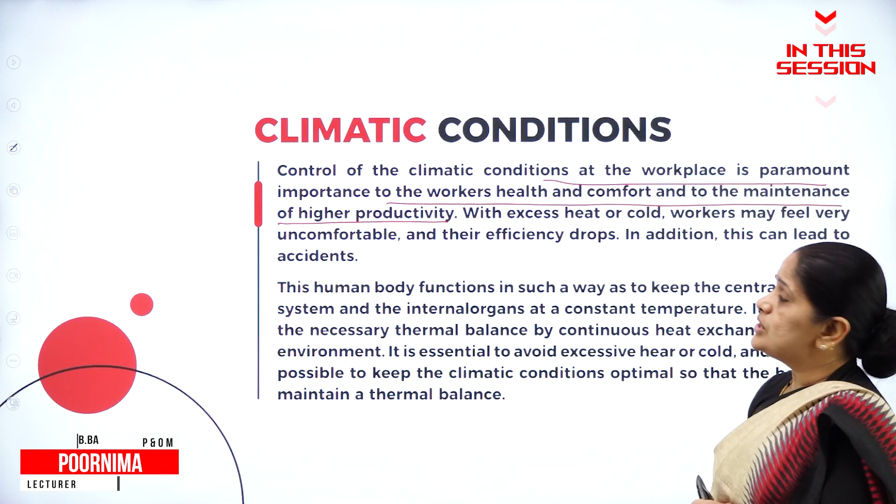Now, what is the kind of lighting you need? What is the degree of lighting you need? It all depends on the minuteness of the work. Control of the climatic conditions is also essential for workers' health and comfort. If it is too hot, there should be provision for fans or ACs. Proper ventilation facility will help in evaporation of the sweat on the body.

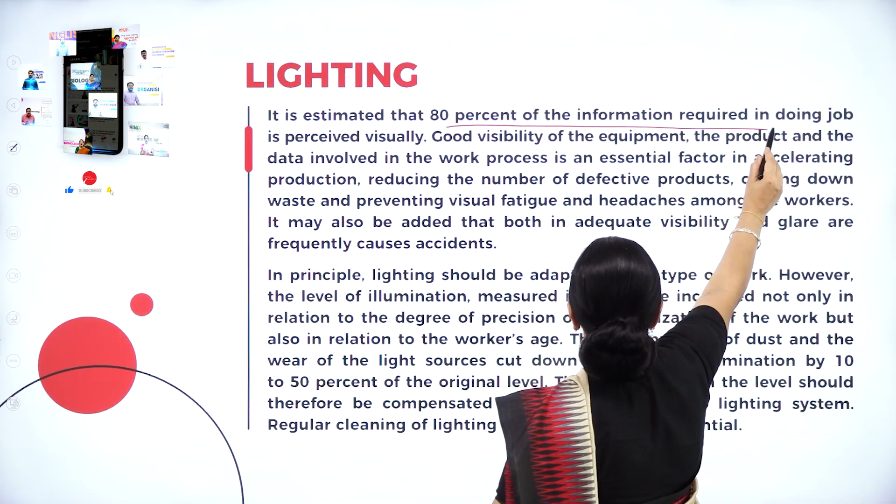It is estimated that 80% of the information required in doing the job is perceived visually. So, whenever we are told a job, the job has to be perceived visually by the worker and then he has to do the job.

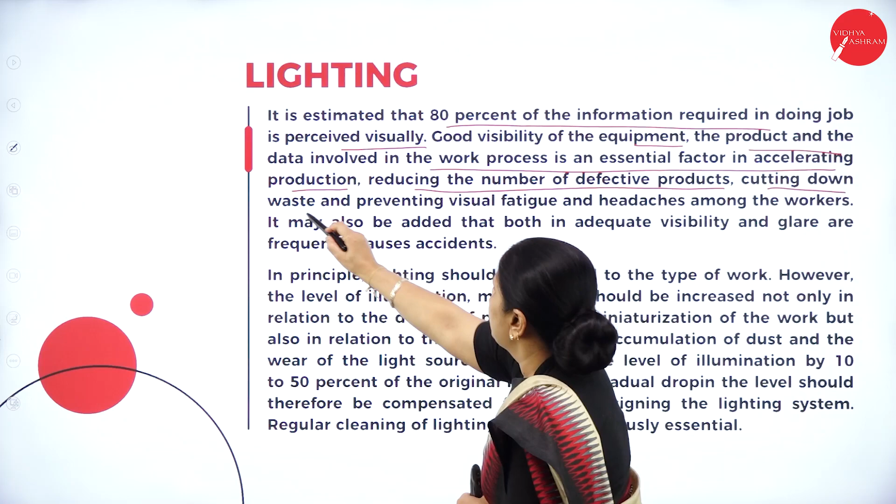Good visibility of equipment, the product and the data involved in the work process is essential in accelerating production, reducing the number of defective products, cutting down waste and preventing visual fatigue and headaches among workers. So, if you have proper lighting facility in the factory layout, we can reduce the number of defective products.

So, if the number of defective products comes down, there will be a reduction in waste, and we can also prevent visual fatigue and headaches among the workers. So, the workers' headaches can be reduced.

It may also be added that both inadequate visibility and glare are frequent causes of accidents. There should not be too much glare in the lighting, nor inadequate lighting — these are the main causes for accidents.

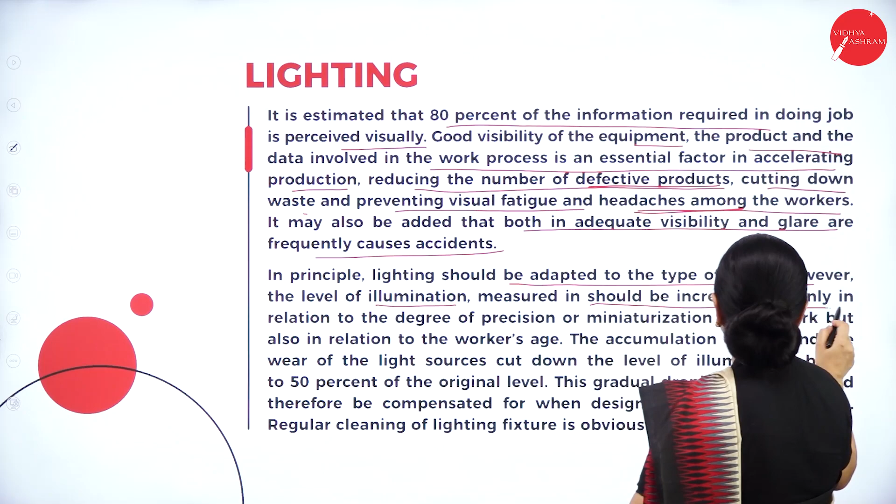In principle, lighting should be adapted to the type of work. However, the level of illumination should be increased not only in relation to the degree of precision or miniaturization of the work, but also in relation to the worker's age.

Now, what is the kind of lighting you need? What is the degree of lighting you need? It all depends on the minuteness of the work.

If you are having very precision work to be done, for example, in a watch assembling unit, you need light focused on the product itself, and the worker has to work on the product with the help of that light because it involves very miniature parts.

So this kind of work requires, depending on the kind of product we are manufacturing, a specific lighting system, also in relation to the worker's age.

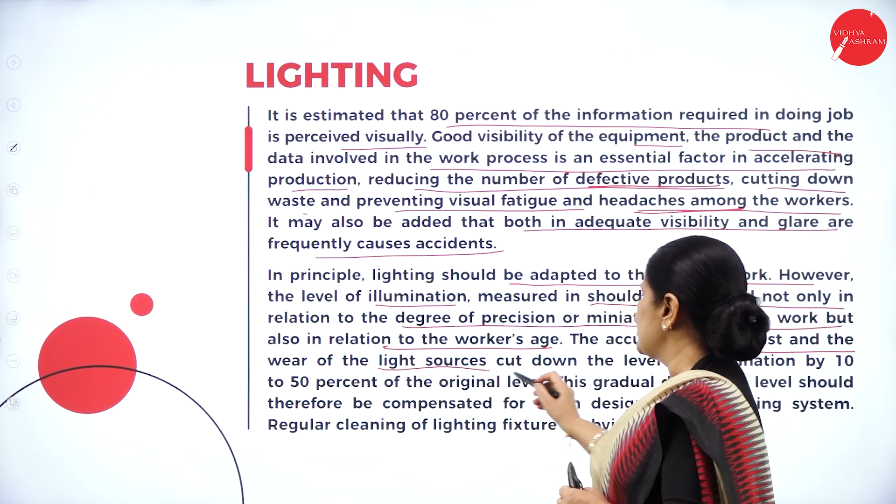The accumulation of dust and the wear of the light sources cut down the level of illumination by 10 to 50% of the original level. So we have to see that proper lighting is essential for the working of employees.

This gradual drop in the level should therefore be compensated for when designing the lighting system. Regular cleaning of lighting fixtures is obviously essential. So, when providing lighting facilities in the factory layout, we should also provide for regular cleaning of the lighting.

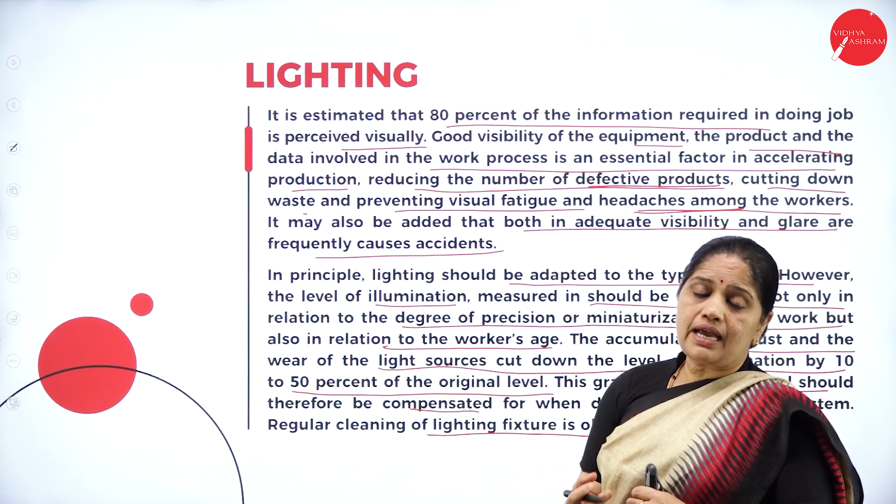Whenever dust settles on the bulb, it will reduce the glare or the light it emits. So, regular cleaning is essential.

Excessive contrast in lighting levels between the worker's task and the general surroundings should also be avoided. There should not be too much difference between the lighting in the work area and the general area. The use of natural light should also be encouraged.

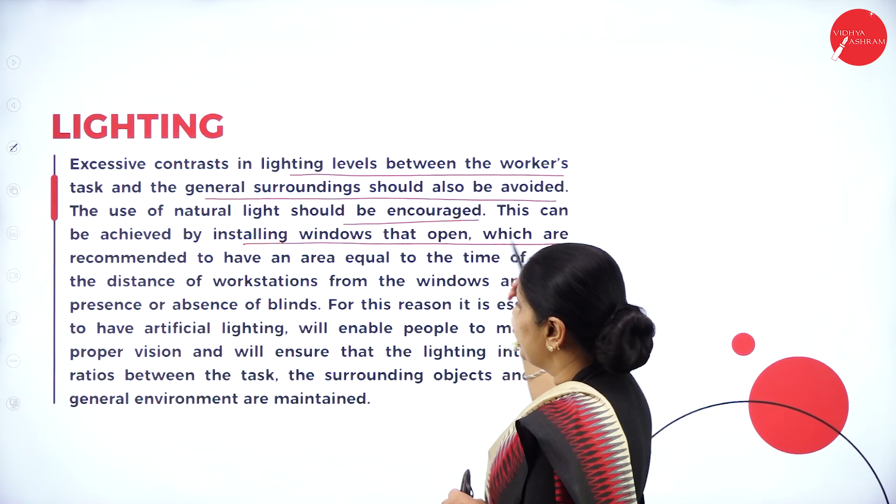Try to make maximum use of the natural light available. This can be achieved by installing windows that open, with an area recommended in relation to the time of the day, the distance of the workstation from the windows, and the presence or absence of blinds.

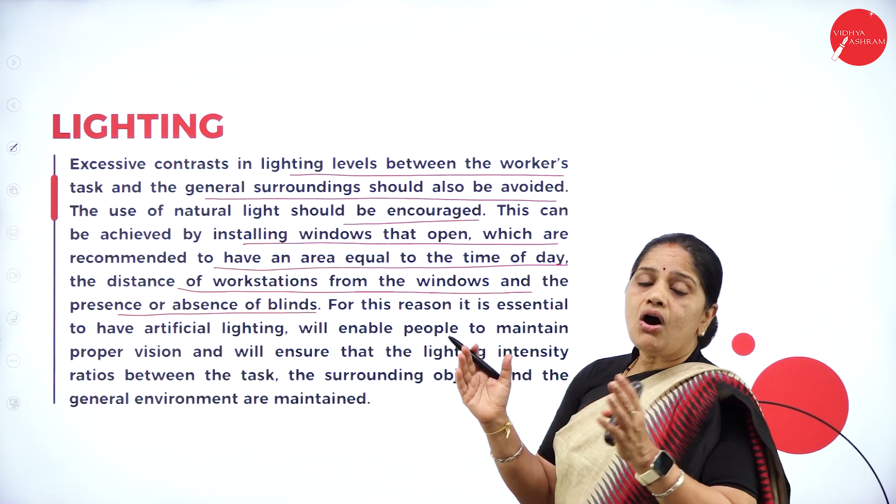So, keeping all these things in mind — the area in relation to the time of day, the distance of the workstation from the windows, and the presence or absence of blinds — all these have to be considered when installing windows.

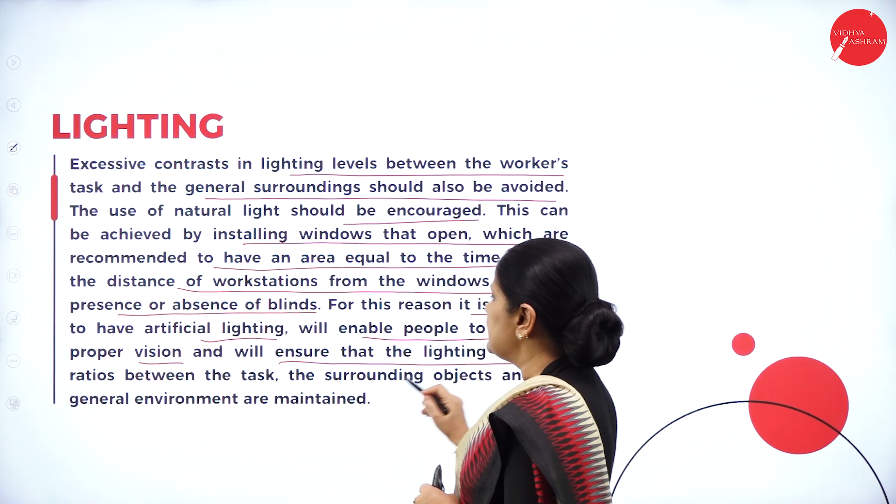For this reason, it is essential to have artificial lighting which will enable people to maintain proper vision and ensure that the lighting intensity ratios between the task, the surroundings and the general environment are maintained.

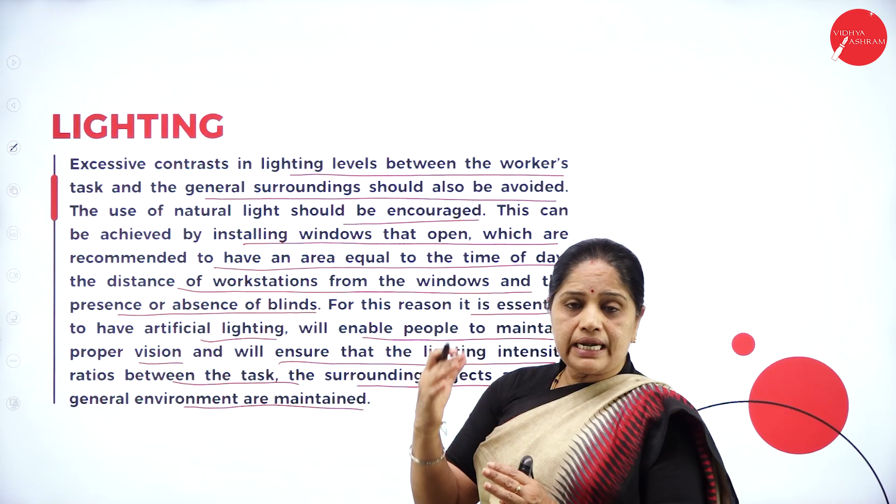So, if there is a lot of difference between the workstation and the general surrounding area of lighting, then it is best to resort to artificial lighting, which will try to reduce the difference between the general lighting and the lighting at the workstation.

Next is the control of lighting. For uniform light distribution, install an independent switch for the row of lighting fixtures closest to the windows. This allows the light to be switched on and off depending on whether or not the natural light is sufficient.

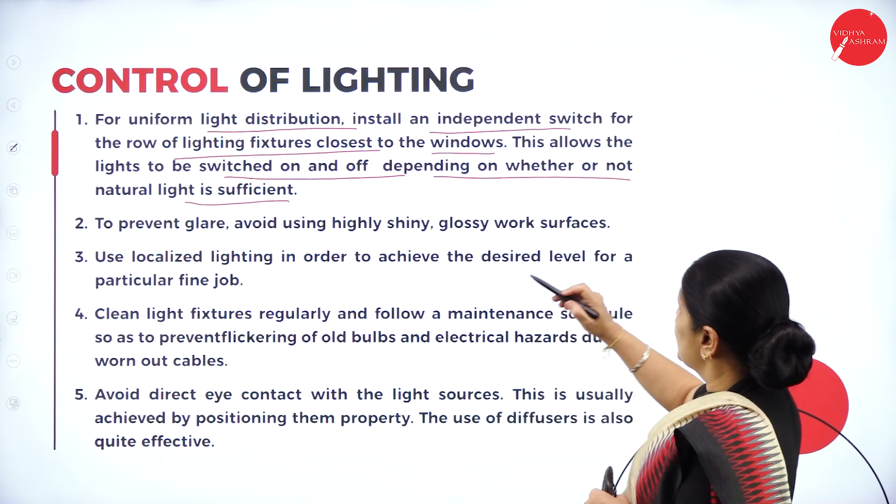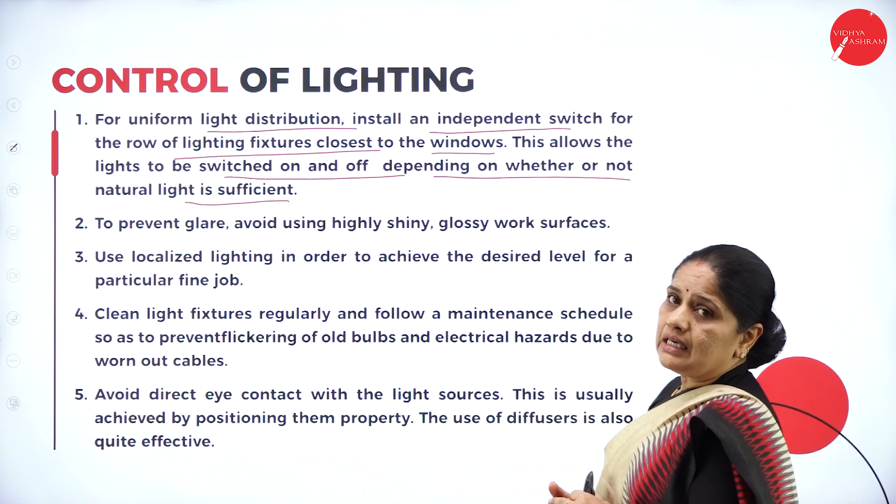For uniform light distribution, install an independent switch for the row of lighting fixtures closest to the windows. So as and when the natural light comes down, that is in the evening when the light is reducing, you can switch on the artificial light.

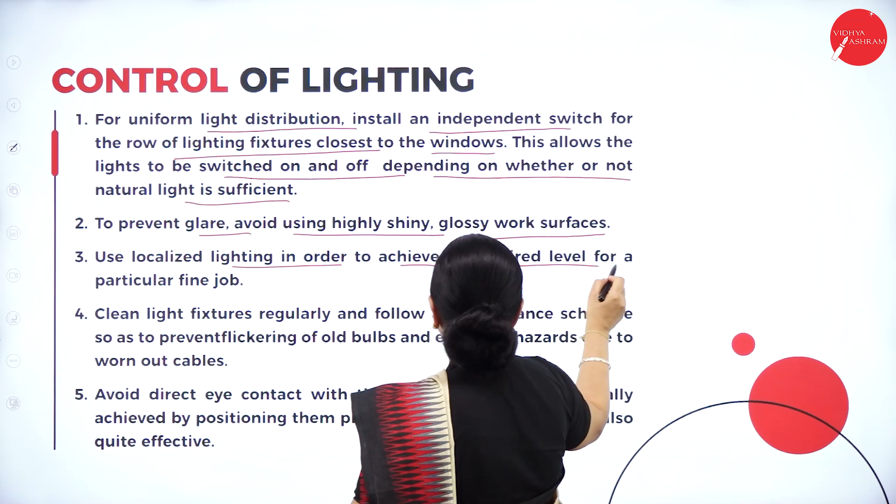To prevent glare, avoid using highly shiny glossy work surfaces. So the work surfaces also should be such that they will not glare the workers. Then use localized lighting in order to achieve the desired level for a particular fine job. So localized lighting should be used.

Clean light fixtures regularly and follow a maintenance schedule so as to prevent flickering of old bulbs and electrical hazards due to worn out cables. So we should also ensure that there is regular maintenance of the cables and regular cleaning of the lights in order to see that there is no flickering of the light and no short circuit because of the worn out cables.

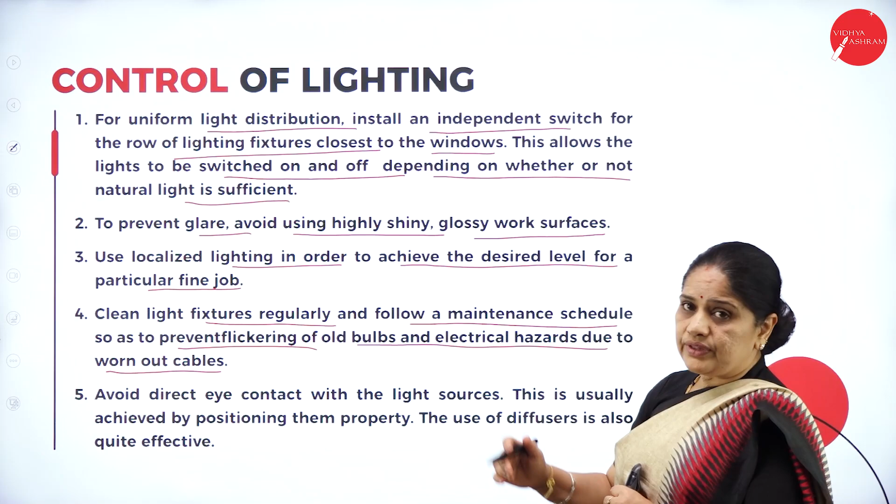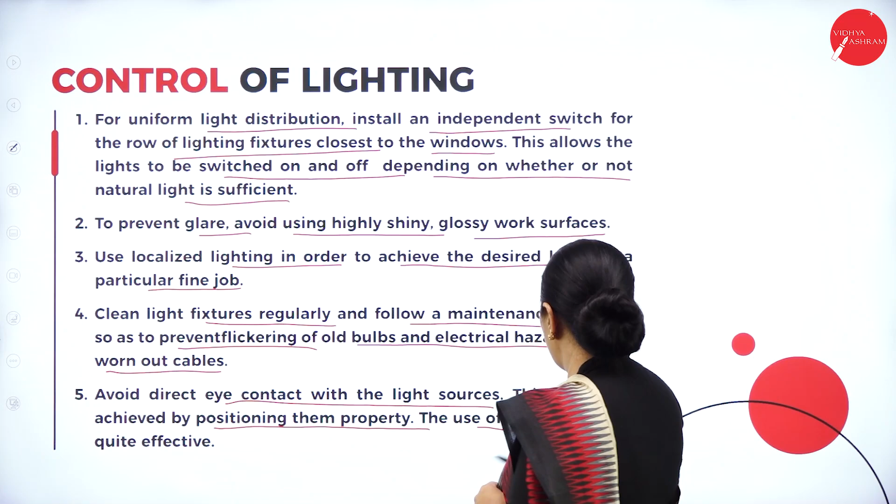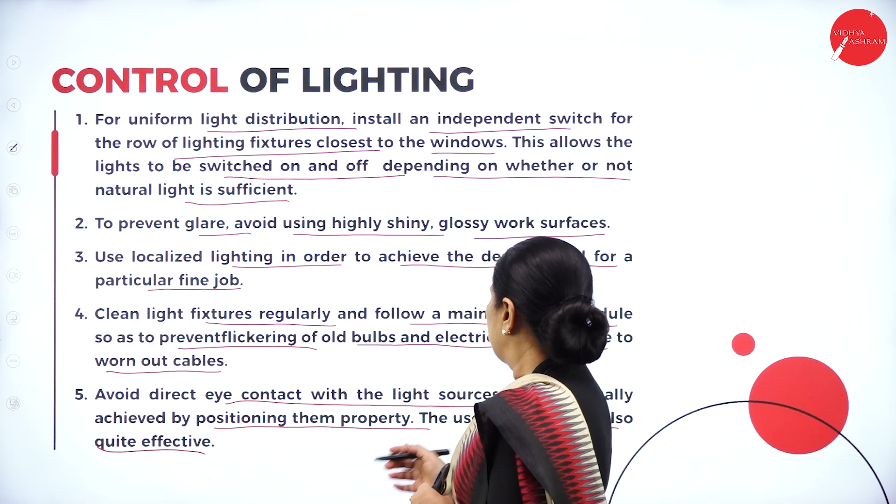Avoid direct eye contact with the light sources. This is usually achieved by positioning them properly. The use of diffusers is also quite effective. So try to see that there is no direct eye contact with the light sources. This can be achieved by positioning them properly. See that the workers don't come in direct contact with the light sources.

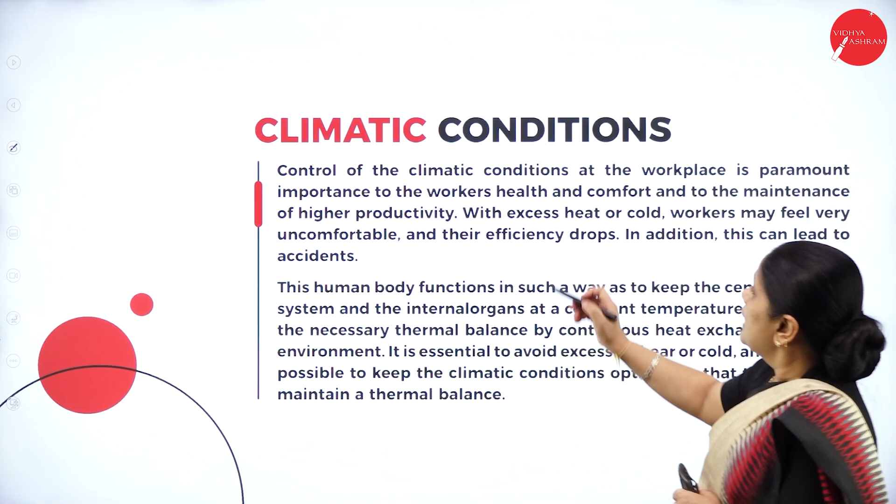Then climatic conditions. The control of the climatic conditions at the workplace is of paramount importance to the workers' health and comfort and to the maintenance of higher productivity. So control of the climatic conditions is essential for workers' health and comfort. If it is too hot, there should be provision for fans or ACs. If it is too cold, there should be provision for heaters to keep the workers comfortable when they

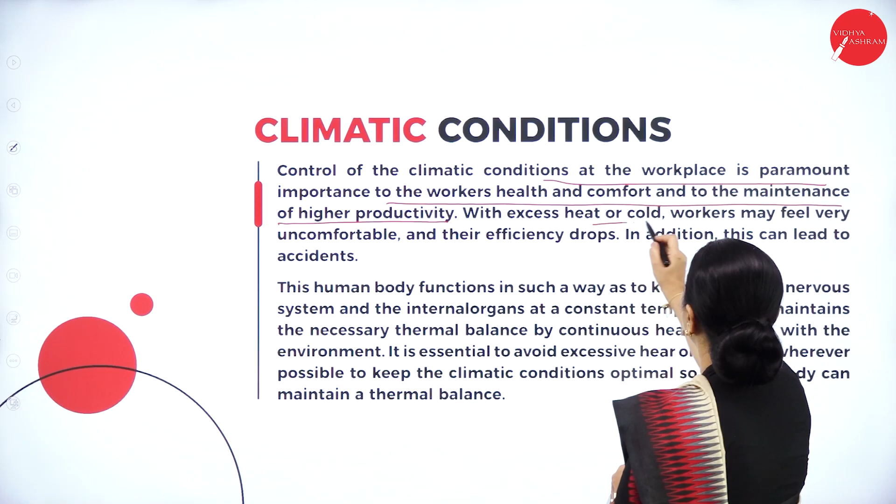are working. With excess heat or cold, workers may feel very uncomfortable and the efficiency drops. So try to keep the workers as comfortable as possible, because the comfort level of the workers will have a direct effect on their efficiency. In addition, this can lead to accidents.

The human body functions in such a way as to keep the central nervous system and the internal organs at constant temperature. So the human body will sustain any kind of heat or cold. It will try to keep itself cool or warm depending on the climatic conditions. It maintains the necessary thermal balance by continuous heat exchange with the environment.

It is essential to avoid excessive heat or cold and wherever possible to keep the climatic conditions optimal so that it maintains a thermal balance. So we should try to ensure that there is proper thermal balance in the human body.

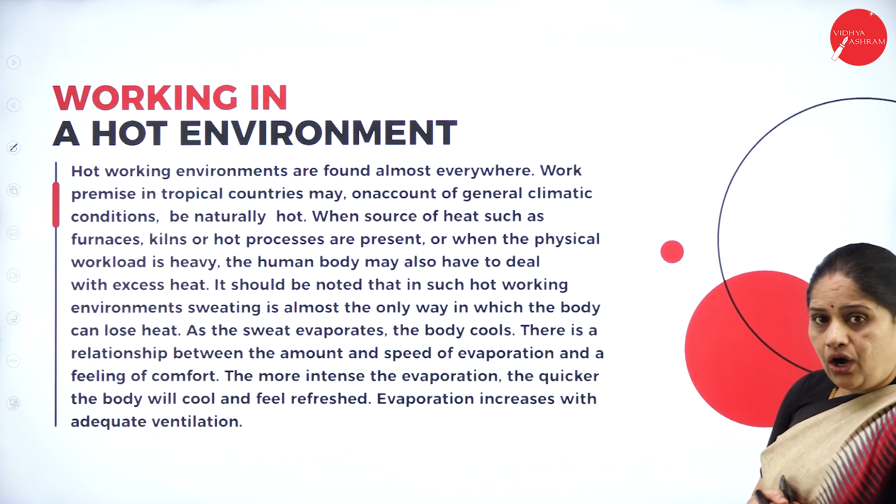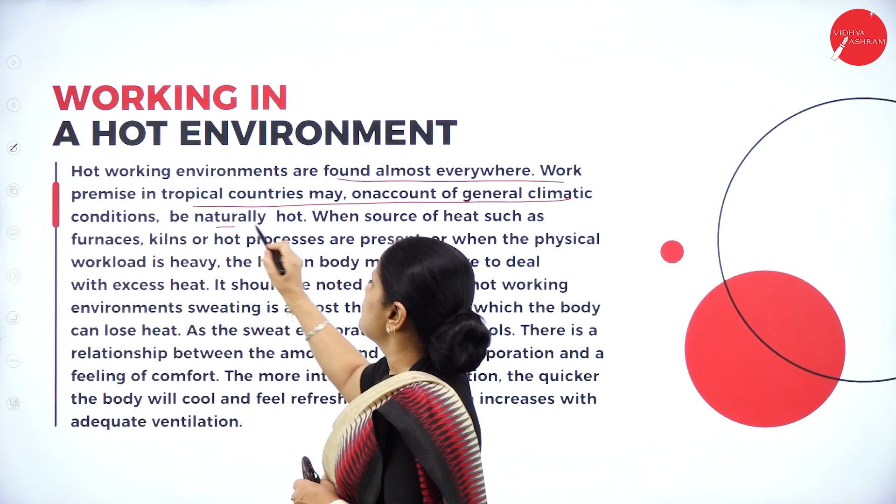Then next, working in a hot environment. Hot working environments are found almost everywhere. Work premises in tropical countries may, on account of general climatic conditions, be naturally hot. Usually in tropical countries like India, we have a very hot climate and workers have to work in this hot climate.

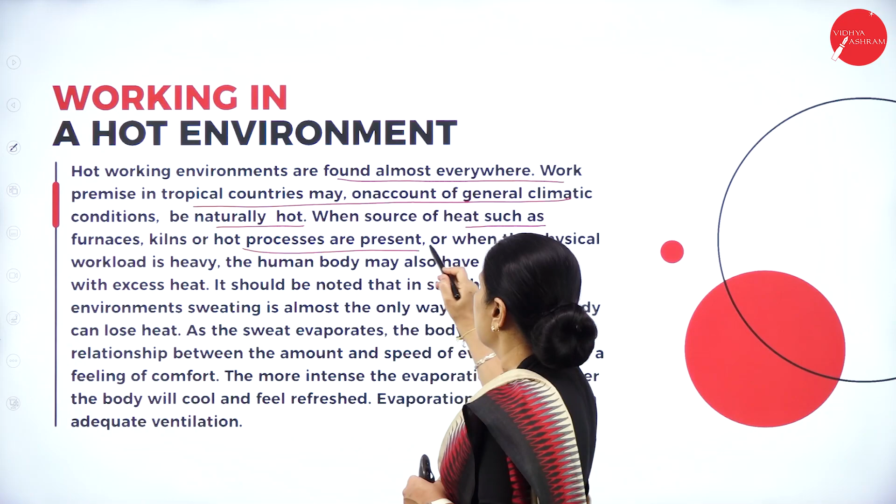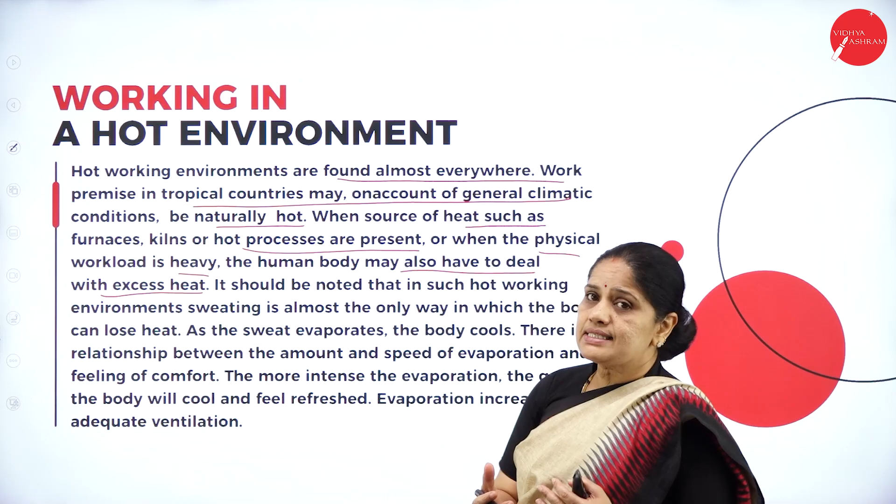When sources of heat such as furnaces, kilns or hot processes are present, or when the physical workload is heavy, the human body may also have to deal with excessive heat. So not only are the climatic conditions hot, but also the work processes. For example, in an iron and steel industry, the workers have to deal with the hot furnace and hot molten iron which will be flowing. So with all this excessive heat, the human body will have to cope with it.

It should be noted that in such hot working environments, sweating is almost the only way in which the body can lose heat. So the body tries to maintain its temperature by sweating. With the help of sweating, the body tries to cool itself. As the sweat evaporates, the body cools.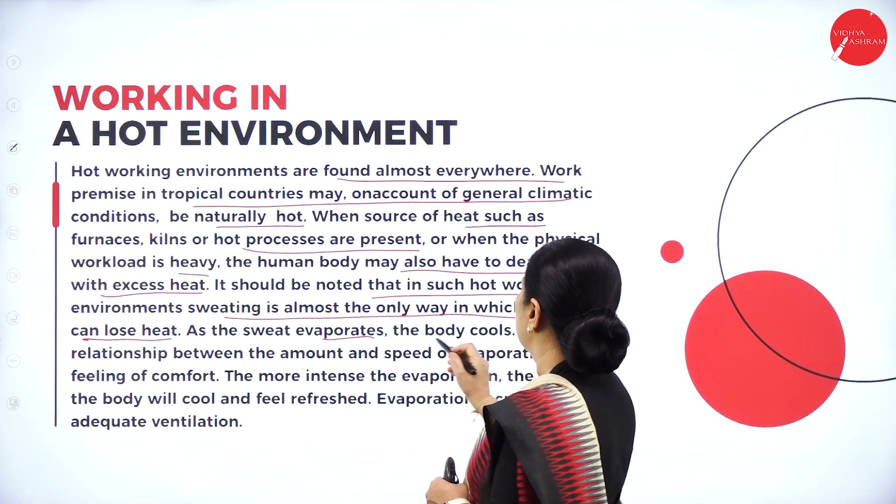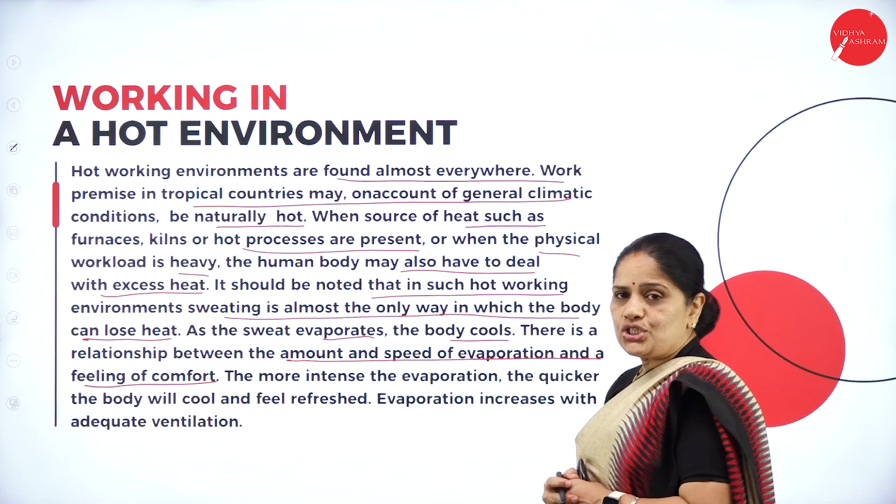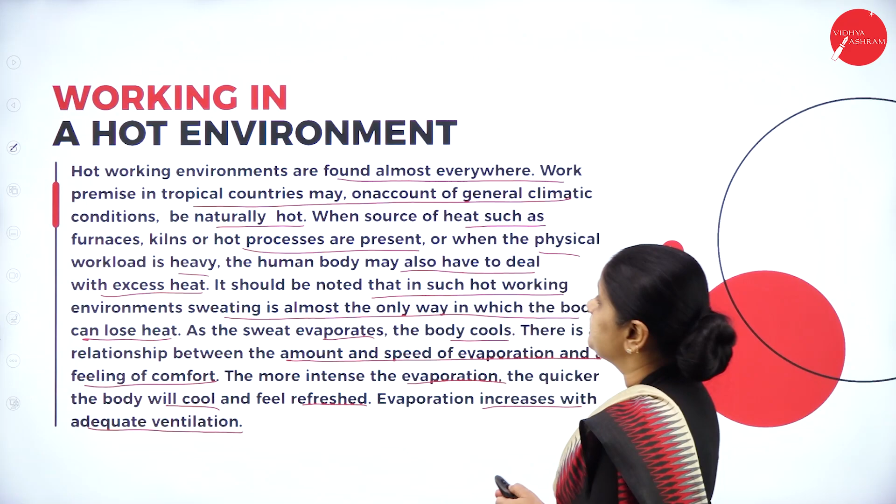There is a relationship between the amount and speed of evaporation and a feeling of comfort when the sweat evaporates from the body. The more intense the evaporation, the quicker the body will cool and feel refreshed. Evaporation increases with adequate ventilation. So when there is proper ventilation in the organization, it will help in evaporation of the sweat which is on the body.

Then, working in a cold environment. Working in a cold environment was once restricted to non-tropical or highly elevated regions, usually found in the cold countries or in the hilly regions where the weather is very cold. Now, as a result of modern refrigeration, various groups of workers, even in tropical countries, are exposed to a cold environment. So even in tropical areas, because of increased refrigeration facilities, we find people working in the cold environment.

Exposure to cold for short periods of time can produce serious effects, especially when workers are exposed to temperatures below 10 degrees centigrade. So we can find some people working in a refrigerated atmosphere, especially in the case of tissue culture or in the manufacture of certain drugs which have to be manufactured in a very cold environment.

Then workers have to be working there in temperatures below 10 degrees. The loss of body heat is uncomfortable and quickly affects the work efficiency. So people who are working under such cold climate, it will reduce their work efficiency.

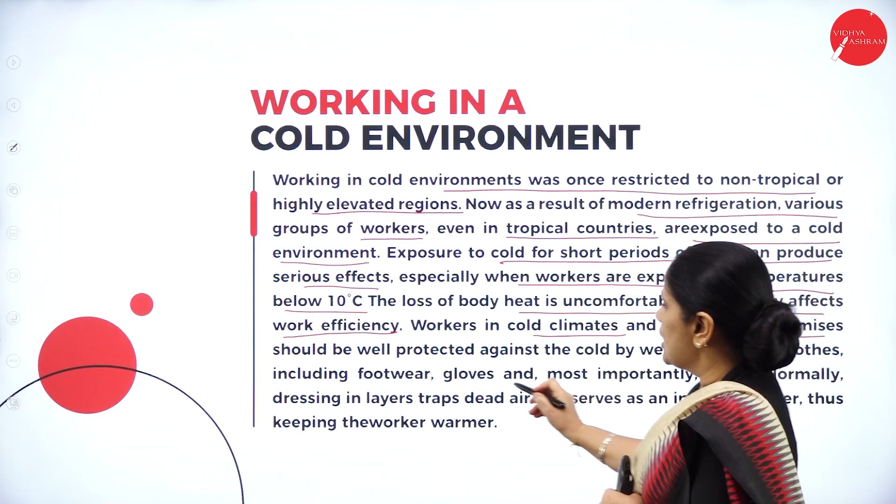Workers in cold climates and refrigerated premises should be well protected against the cold by wearing suitable clothes, including footwear, gloves, and most importantly, a hat. So workers who are working in such conditions, we have to provide them with protective clothes so that they can withstand the cold. So they should be provided with the gloves, hat, and also the proper footwear.

Normally, dressing in layers traps dead air and serves as an insulation layer, thus keeping the worker warmer. So try to see that the workers are kept warm when they are working under such cold conditions.

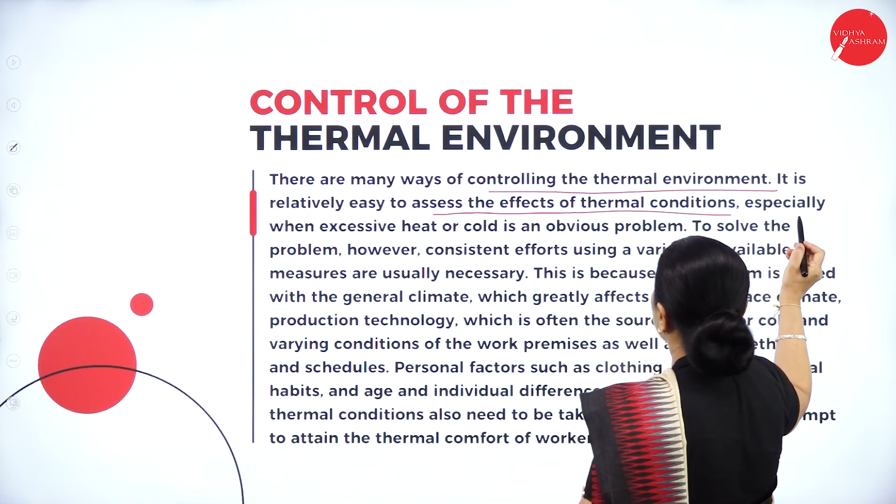Next, control of the thermal environment. There are many ways of controlling the thermal environment. It is relatively easy to assess the effect of the thermal conditions, especially when excessive heat or excessive cold is an obvious problem. So, in case of thermal conditions, try to see that the worker is not exposed to the extremities of heat or cold. To solve the problem, however, consistent efforts using a variety of available measures are usually necessary. So, how do we cope with the extremities of the climate?

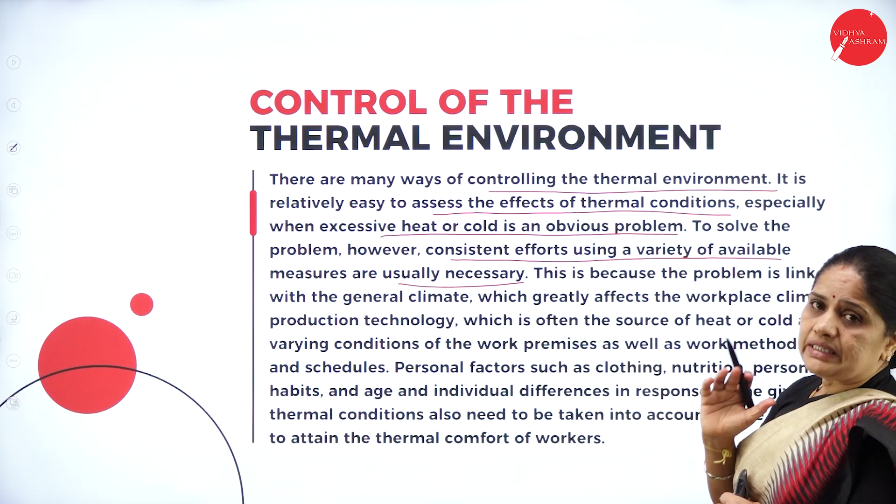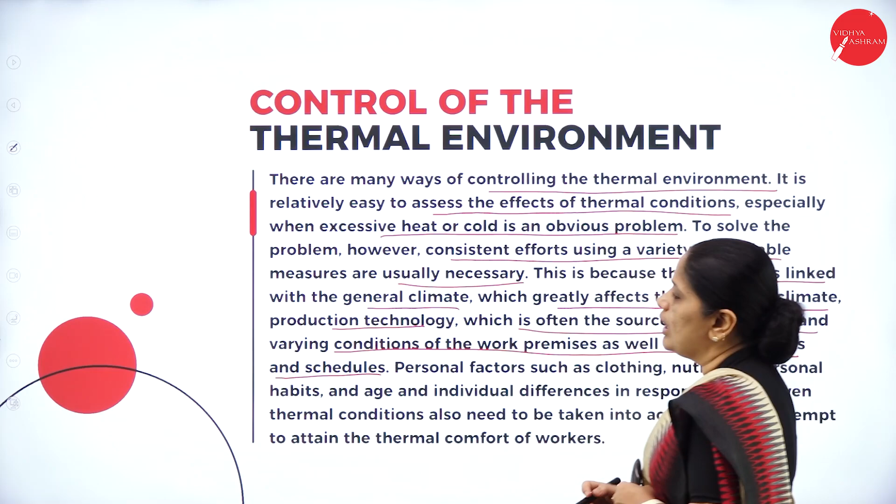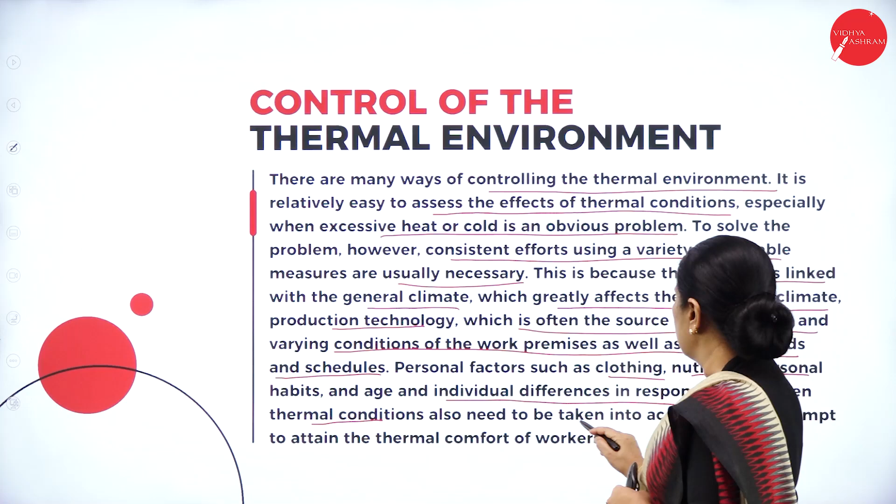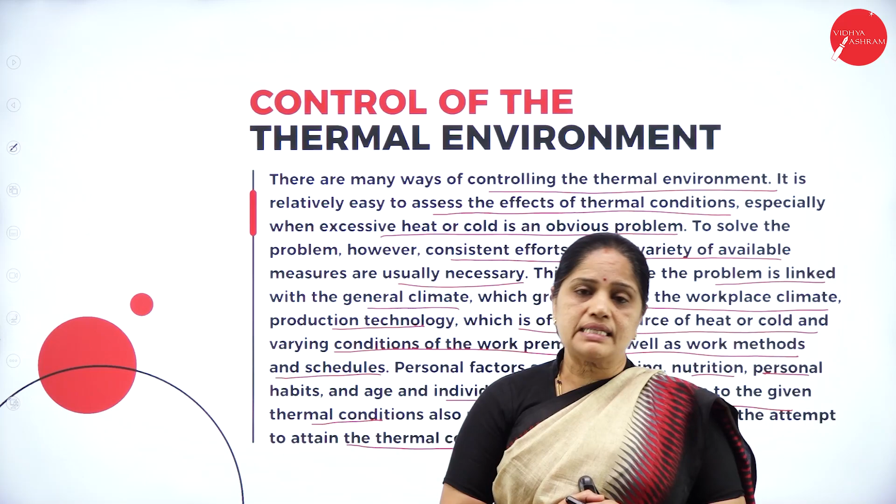This is because the problem is linked with the general climate, which greatly affects the workplace climate, production technology, which is often the source of heat or cold, and the varying conditions of the work premises, as well as work methods and schedules. So all this will have a bearing on the thermal climate. Personal factors such as clothing, nutrition, personal habits, and age, and individual differences in response to the given thermal conditions also need to be taken into account in an attempt to attain the thermal comfort of the workers. So the thermal comfort of the workers has to be taken into consideration when we are making them work in such an environment.

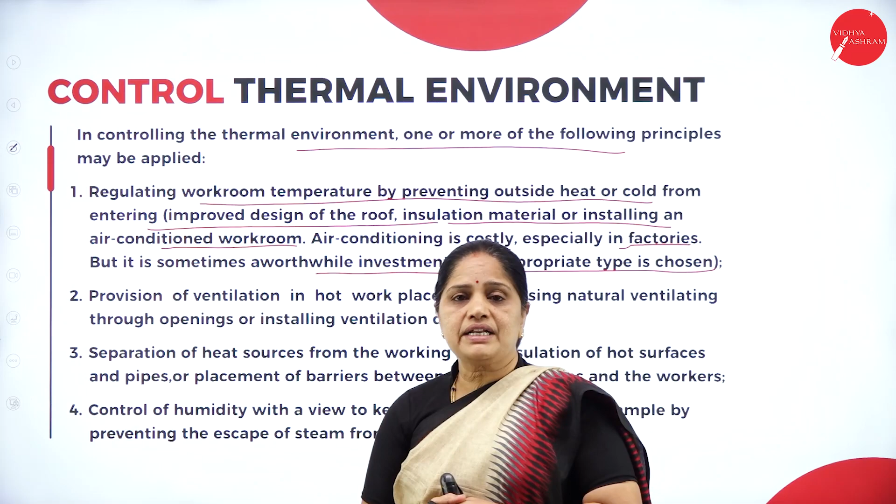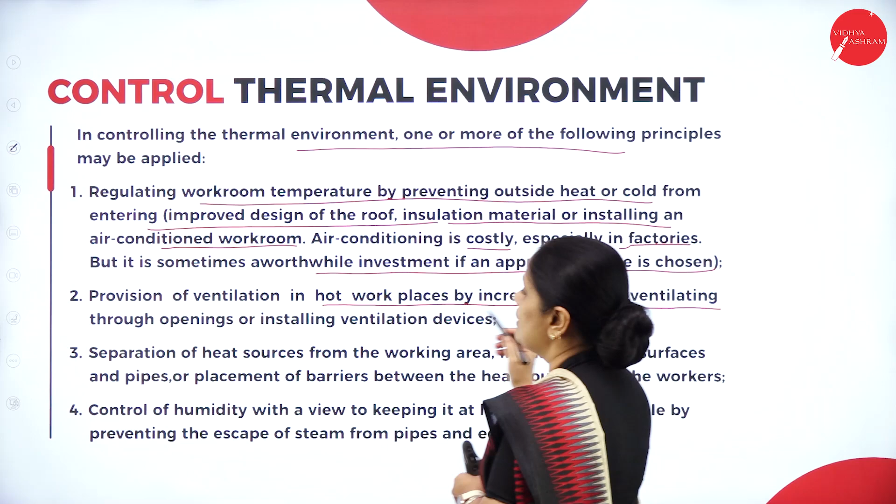Air conditioning is costly, especially in factories, but it is sometimes a worthwhile investment if an appropriate type is chosen. Air conditioning of the entire factory will be a very costly affair, but it depends on the management policy. Provision of ventilation in hot workplaces by increasing natural ventilation through openings or installing ventilation devices. So try to provide as much ventilation as possible.

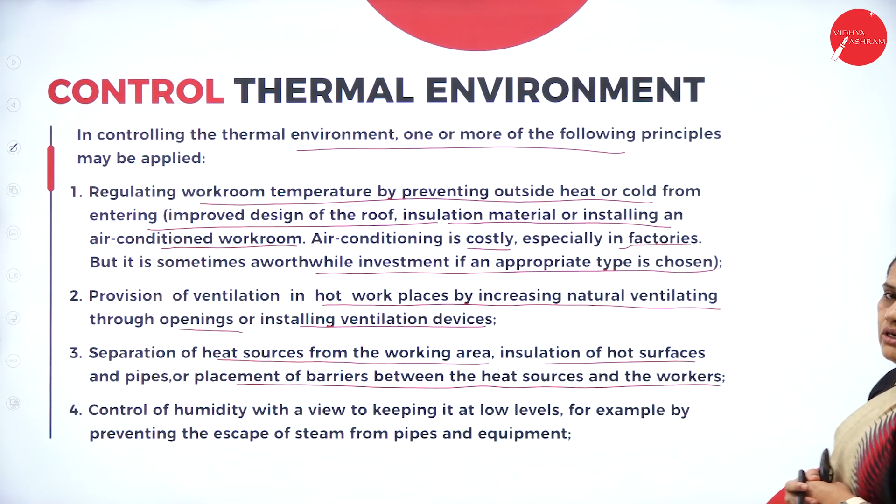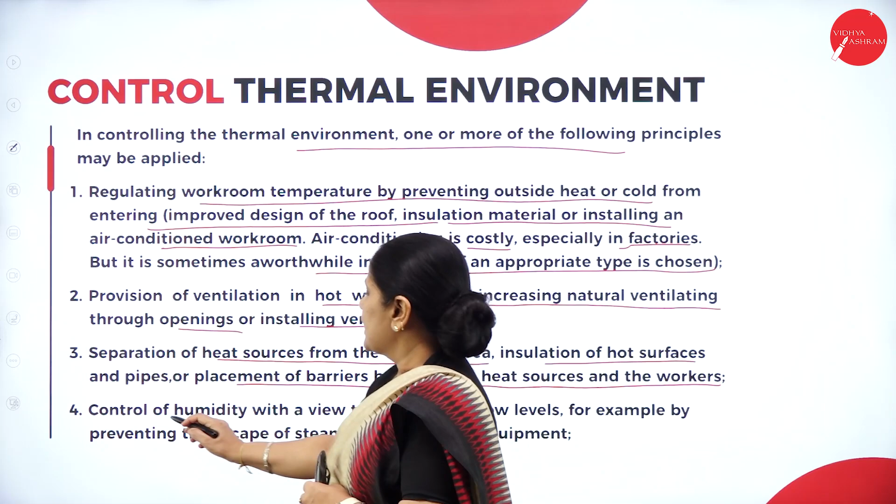Separation of heat sources from the working area, insulation of hot surfaces and pipes, or placement of barriers between the heat sources and the workers. So when we separate heat sources from the working area, we can avoid the heat from reaching the employees. The control of humidity with a view to keeping it at low levels, for example, by preventing the escape of steam from pipes and equipment. So we can control the humidity by taking some preventive measures.

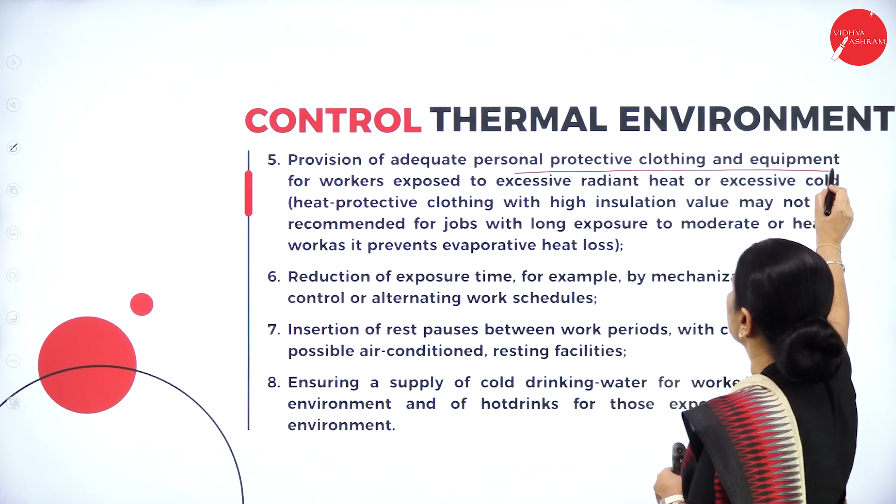Next, the provision of adequate personal protective clothing and equipment for workers exposed to excessive radiant heat or excessive cold. Heat protective clothing with high insulation value may not be recommended for jobs with long exposure to moderate or heavy work, as it prevents evaporative heat loss. So if you are giving protective gear to the employees, try to see that it does not have a bearing on the work efficiency. Try to see that it increases the efficiency of the workers.

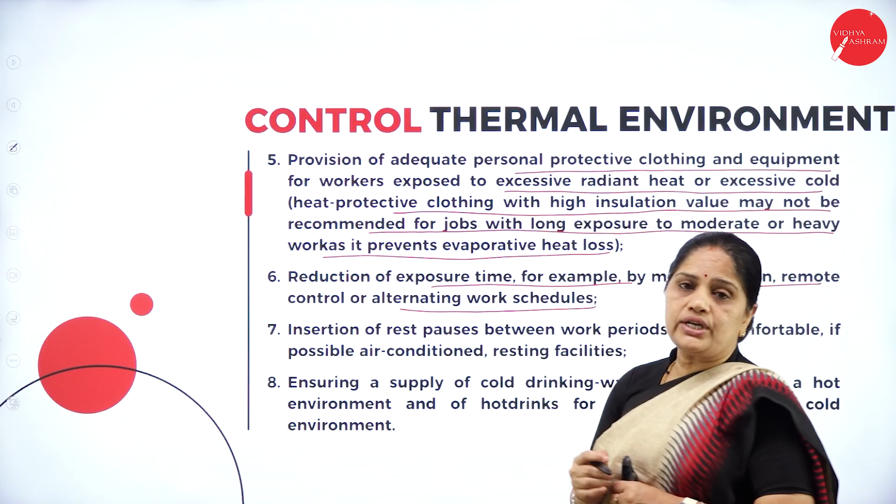The reduction of exposure time, for example, by mechanization, remote control, or alternating work schedules. So in case the worker has to work under such extreme conditions, proper provision should be made so that it can be mechanized. The entire process can be mechanized and operated by the worker with the help of remote control. In this way, we can protect the workers.

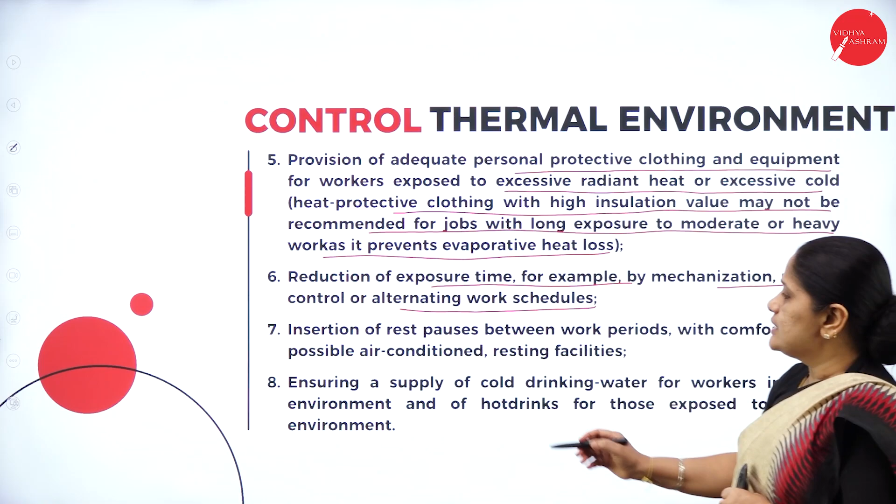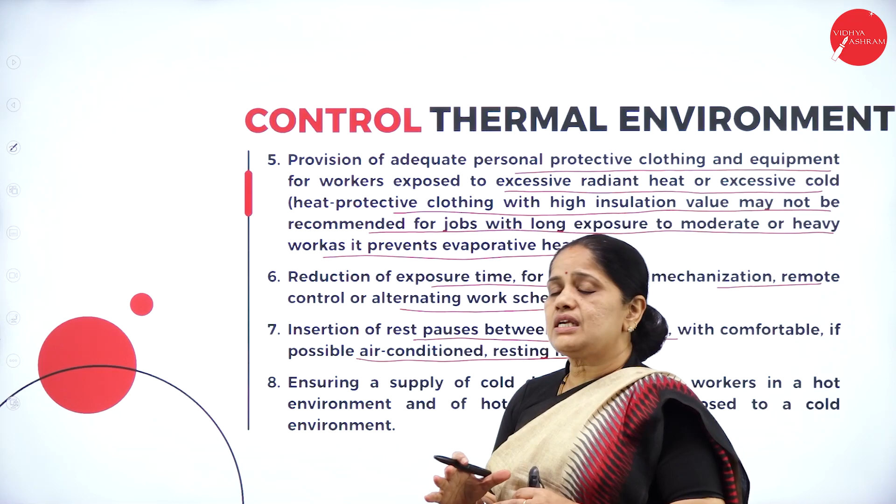And insertion of rest pauses between work periods with comfortable, possibly air-conditioned resting facilities. So if the worker has to work under hot conditions, there should be proper rest intervals for the worker. When he is resting, the resting area should be properly air conditioned so that he can bear the heat.

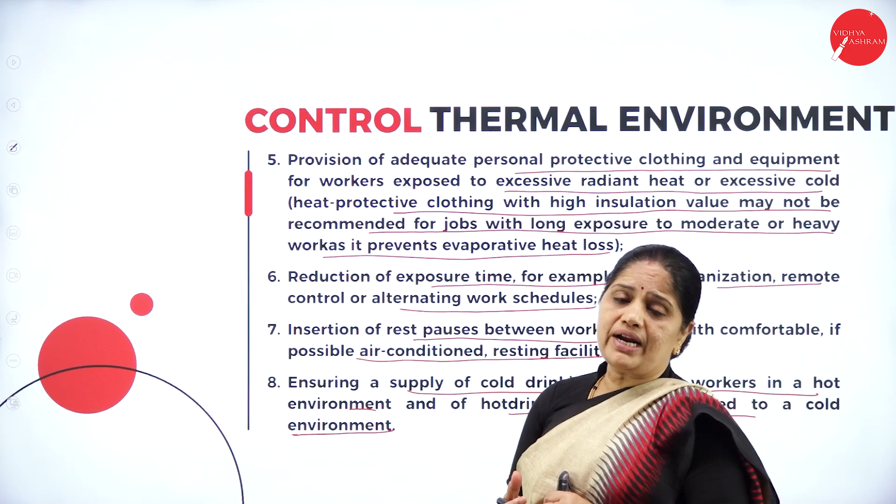Then ensuring a supply of cold drinking water for workers in a hot environment and hot drinks for those exposed to a cold environment. So if the worker is working in a cold environment, make provision for hot drinks. And if the worker is working in a hot environment, see that he is provided with cold drinks. Next, ventilation.

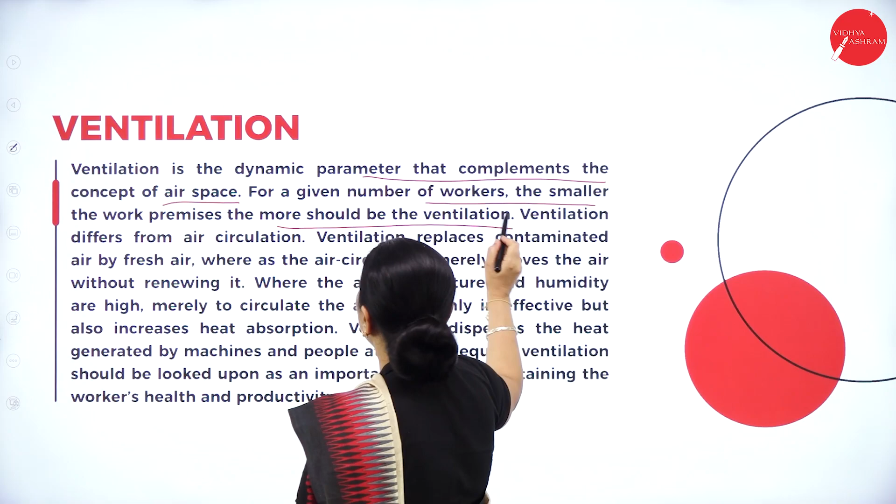Ventilation is the dynamic parameter that complements the concept of airspace. So, the movement of air within the building or factory can be complemented with the help of proper ventilation. For a given number of workers, the smaller the work premises, the more should be the ventilation. So if the workspace is small and the number of workers is more, then there should be proper ventilation provided.

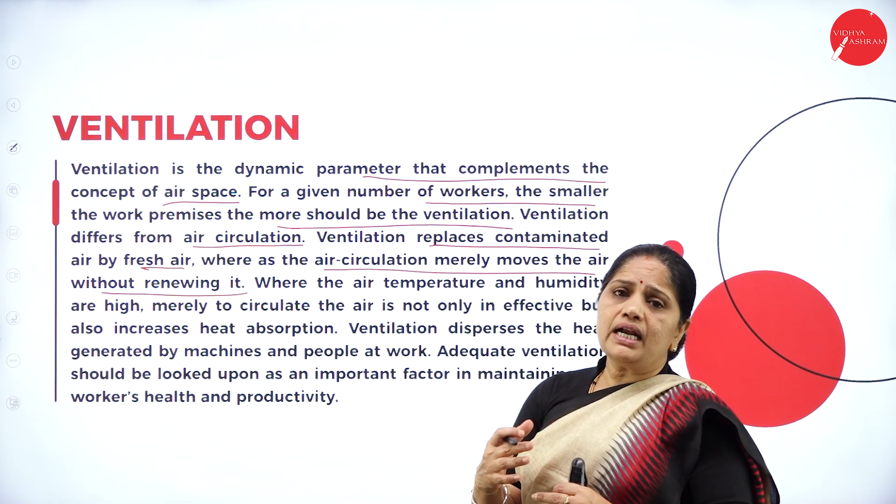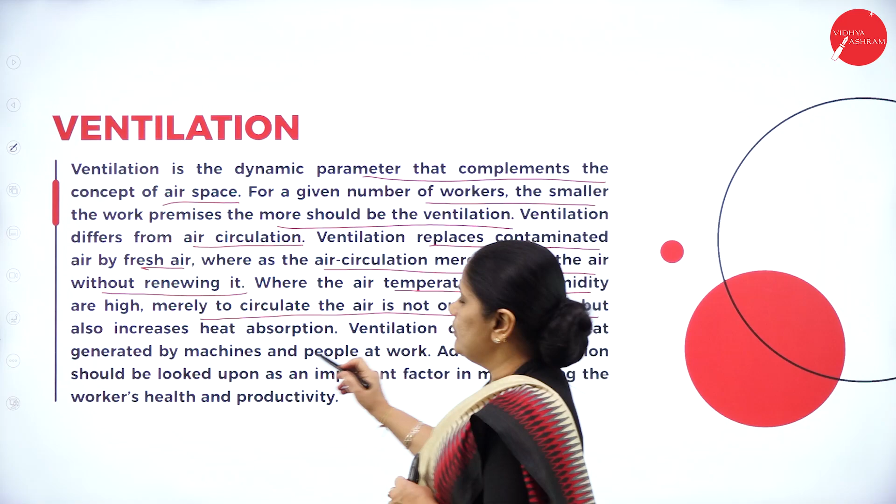Ventilation differs from air circulation. Ventilation replaces contaminated air by fresh air, whereas air circulation merely moves the air without renewing it. So ventilation should not be mistaken with air circulation. Ventilation means it will replace the contaminated air with fresh air, whereas air circulation will just be moving the air. Where air temperature and humidity are high, merely circulating the air is not only ineffective but also increases heat absorption.

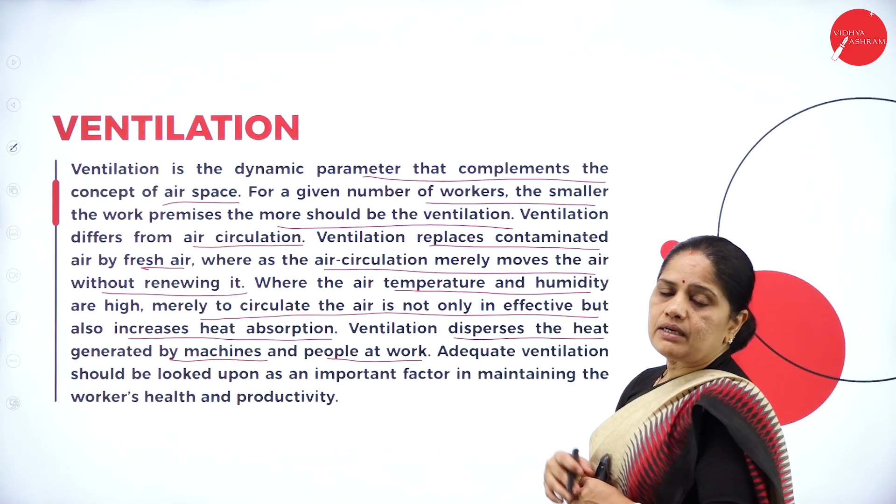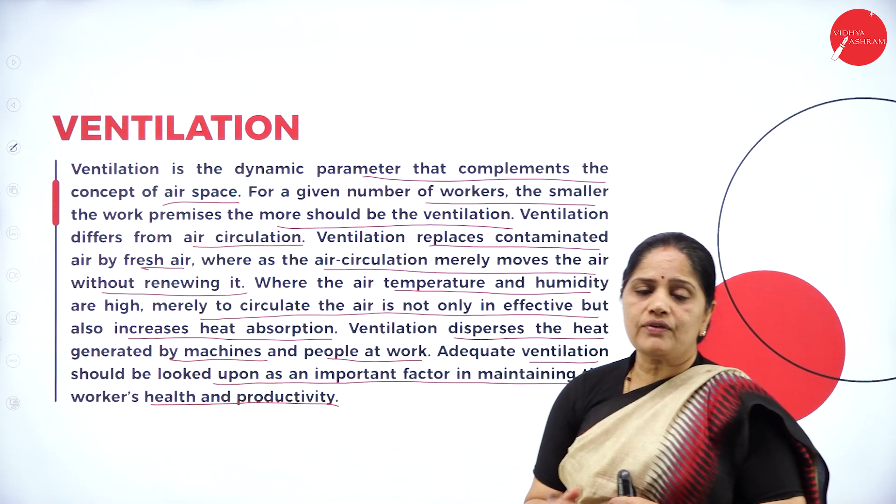So where the air temperature is very high, ventilation will help in having a cooling effect within the factory building. Ventilation disperses the heat generated by machines and people at work. Adequate ventilation should be looked upon as an important factor in maintaining the workers' health and productivity. In essence, ventilation will have a bearing on the worker's efficiency and his comfort zone. So, we should make proper provision for ventilation in the factory building.

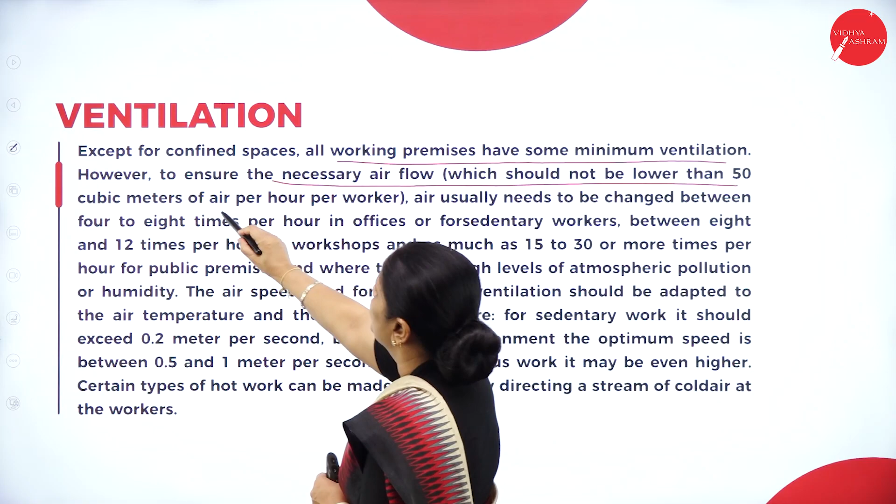Except for confined spaces, all working premises have some minimum ventilation. However, to ensure necessary airflow, which should not be lower than 50 cubic meters of air per hour per worker, air usually needs to be changed between 4 to 8 times per hour in offices or for sedentary workers, between 8 to 12 times per hour in workshops, and as much as 15 to 30 times for public premises where there are high levels of atmospheric pollution or humidity.

So, depending on the number of workers who are working in the environment, the air has to be changed. If there are more workers working in that confined space, then the air has to be changed at least 15 to 30 times per hour. But if the workers are fewer, then you can change the air between 4 to 8 times. So depending on the number of workers, we need to have proper ventilation of the air.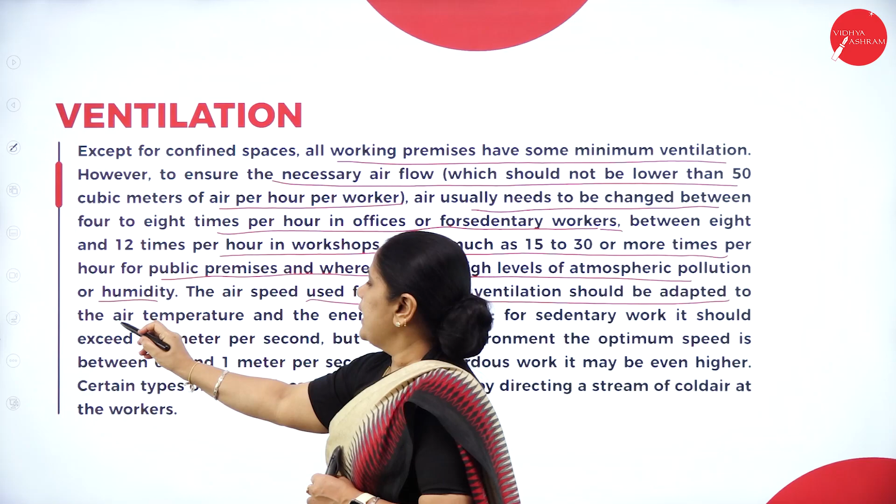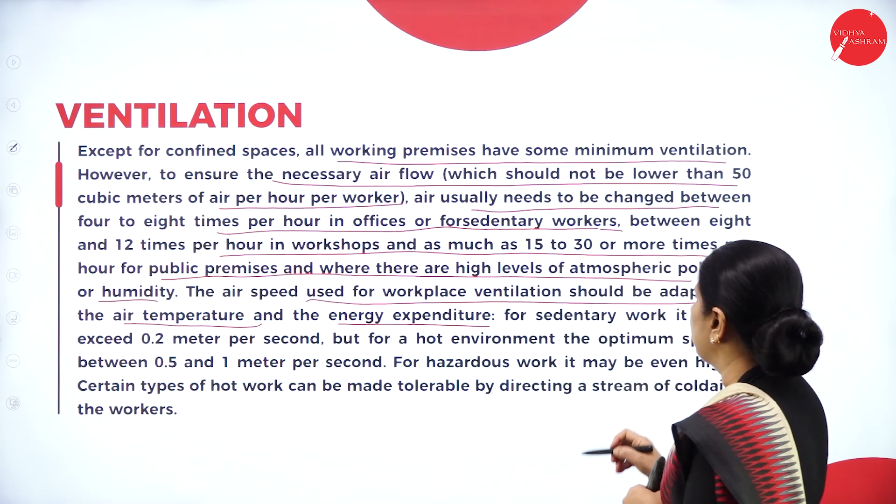The air speed used for workplace ventilation should be adapted to the air temperature and the energy expenditure. For sedentary work, it should exceed 0.2 meter per second. So this is the air speed we are talking about. Sedentary means the workers are simply sitting in one place and doing the work; for them the air speed is 0.2 meters per second.

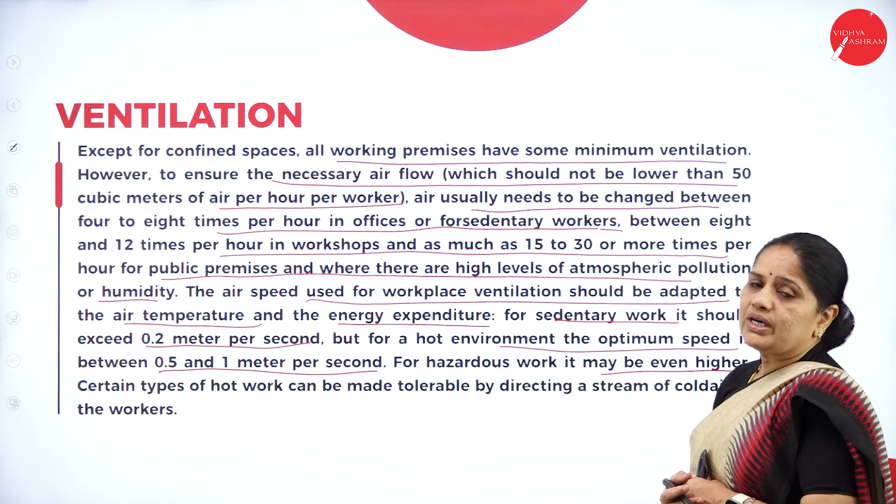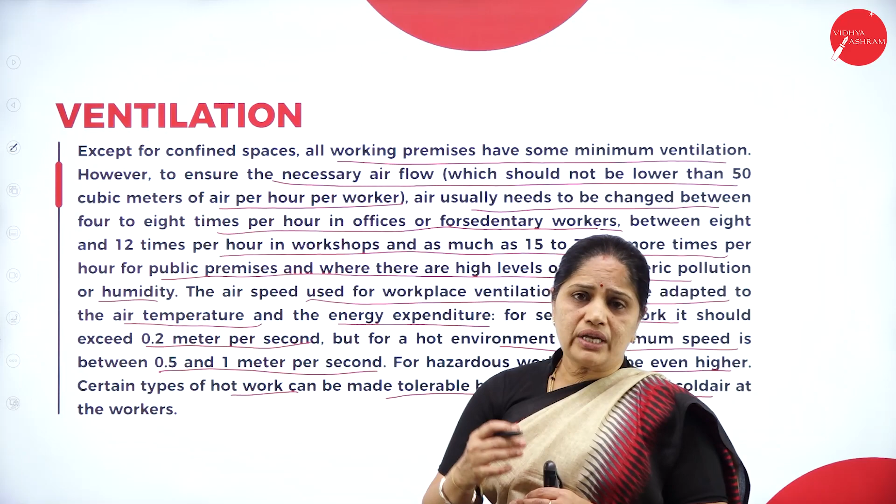But for hot environments, the optimum speed is 0.5 to 1 meter per second. For hazardous work, it may be even higher. So if the worker is doing some dangerous work, then the air speed should be higher. Certain types of hot work can be made tolerable by directing a stream of cold air at the workers. So if workers are working in a very hot environment, you can have a stream of cold air at intervals which will flow on the workers and have a cooling effect.

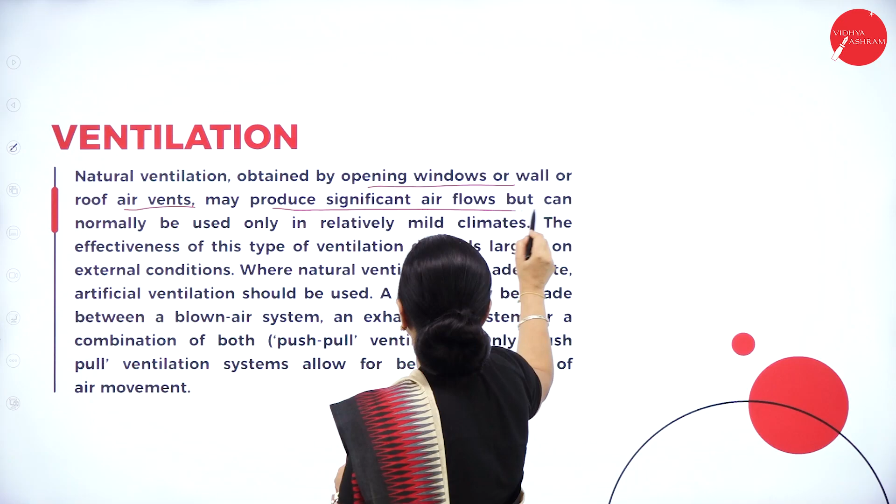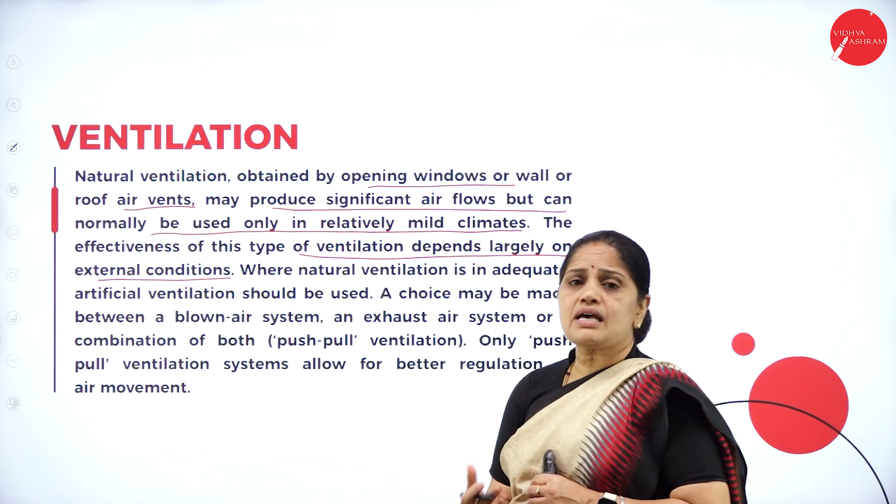Natural ventilation obtained by opening windows or wall or roof air vents may produce significant air flows but can normally be used only in relatively mild climates. The effectiveness of this type depends largely on the external conditions. So if the external conditions are favorable, natural ventilation can be used. But if it is too hot, during the summer season, it is best to have a proper system of air conditioning. Where natural ventilation is inadequate, artificial ventilation should be used.

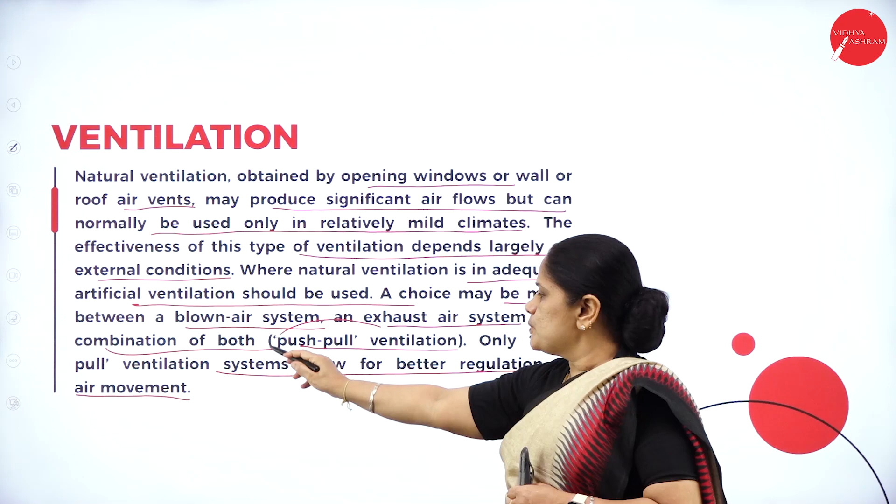A choice may be made between a blown air system, an exhaust air system, or a combination of both: push-pull ventilation. Only push-pull ventilation systems allow for better regulation of air movement. So when providing proper ventilation to the workers, we should take care about the natural climatic condition, and depending on that, plan the ventilation system: a blown air system, an exhaust air system, or a combination of both, which we call push-pull ventilation. It allows for better regulation of the air movement.

Then work-related welfare facilities. Welfare facilities offered at or through the workplace can be important factors. Some facilities are very basic but often ignored, such as drinking water and toilets. These are the basic facilities which have to be provided for every worker working in a factory. Others may seem less necessary but usually have an importance to workers far greater than the cost to the enterprise.

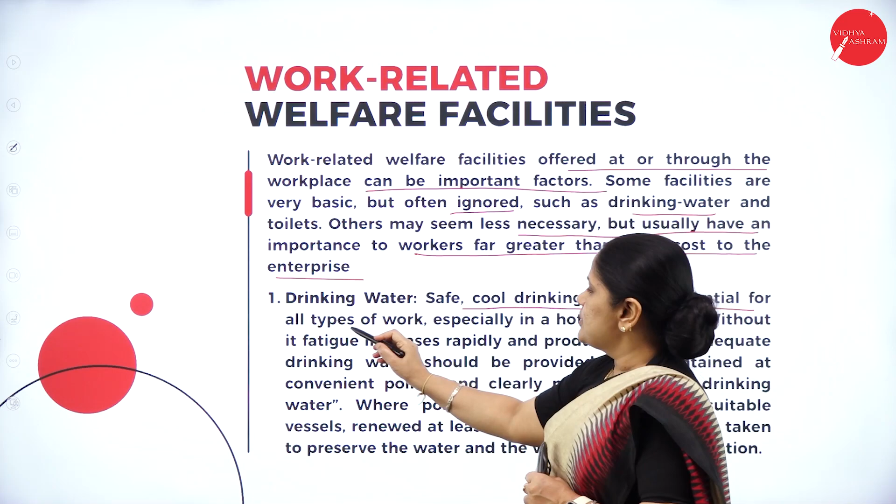So we have to ensure that at least workers are provided with drinking water and toilets. Safe, cool drinking water is essential for all types of work, especially in a hot environment. Without it, fatigue increases rapidly and productivity falls.

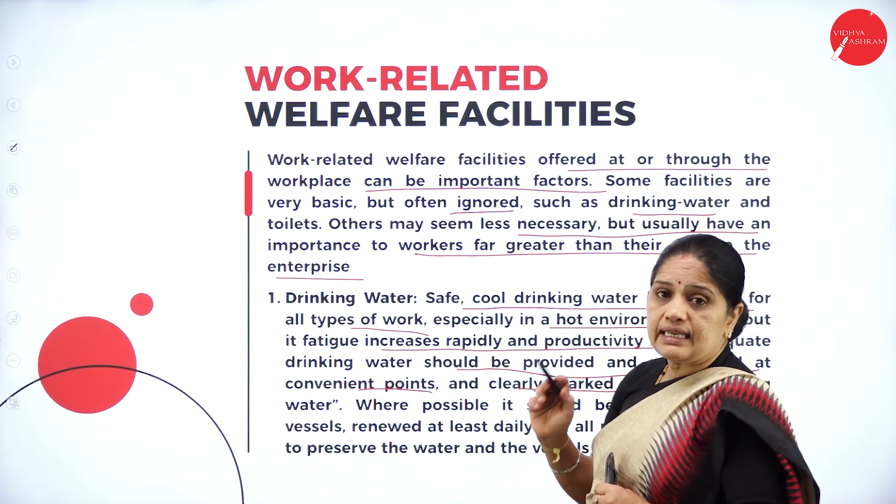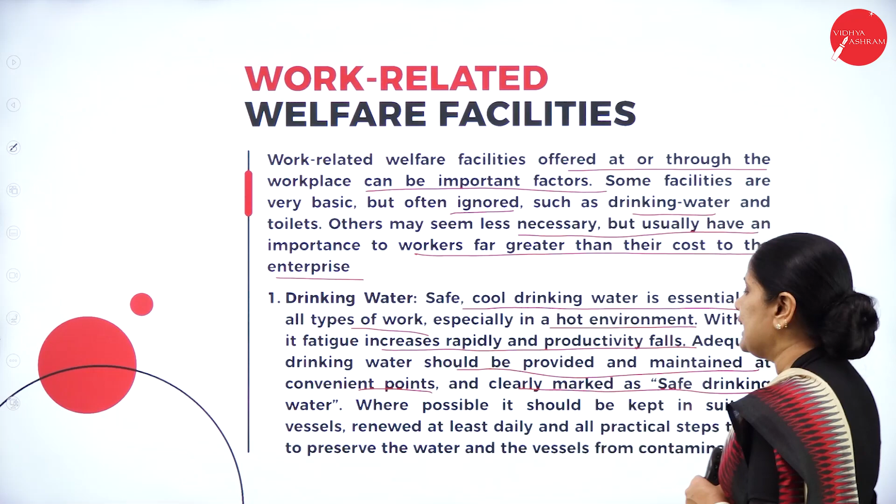Adequate drinking water should be provided and maintained at convenient points, clearly marked as safe drinking water, at convenient places within the plant layout. Wherever possible, it should be kept in suitable vessels, renewed at least daily, with all practical steps taken to preserve the water and vessels from contamination. When workers go to drink the water, we should ensure it is properly protected.

Next is sanitary facilities. Hygienic sanitary facilities should exist at workplaces, particularly important where chemicals or other dangerous substances are used. Sufficient toilet facilities with separate provisions for men and women should be installed and conveniently located. Changing rooms and cloakrooms should be provided. Washing facilities such as wash basins with soap, towels, and showers should be placed either within the changing rooms or close by. All these facilities should be ensured for the workers.

First aid and medical facilities: facilities for rendering first aid and medical care at the workplace in case of accidents or unforeseen sickness are directly related to the health and safety of workers. It is necessary to have a first aid and medical kit to help workers in case of emergency. First aid boxes should be clearly marked, conveniently located, and contain only prescribed standard requisites, in charge of a qualified person.

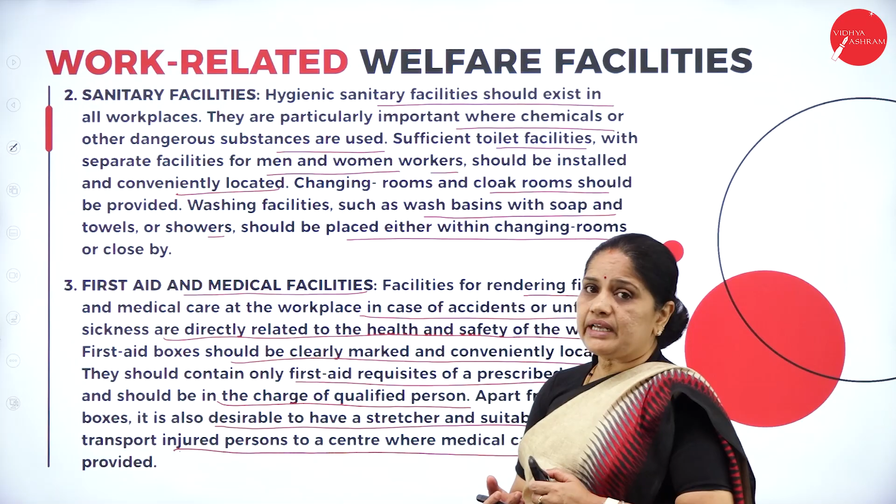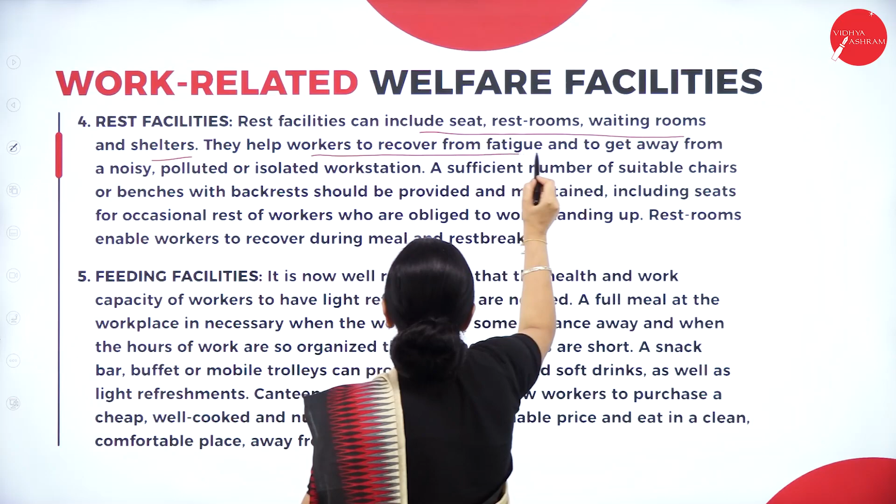Then rest facilities. Rest facilities include seats, restrooms, waiting rooms and shelters. They help workers recover from fatigue and get away from a noisy, polluted or isolated workstation. A sufficient number of suitable chairs or benches with backrests should be provided and maintained, including seats for occasional rest of workers obliged to work standing up. Restrooms enable workers to recover during meal and rest breaks, so they can rejuvenate themselves during intervals.

Then feeding facilities. It is now well recognized that the health and work capacity of workers require light refreshments. A full meal at the workplace is necessary when workers live some distance away and meal breaks are short. A snack bar or mobile trolleys can provide tea, coffee, soft drinks and light refreshments. All these can be provided.

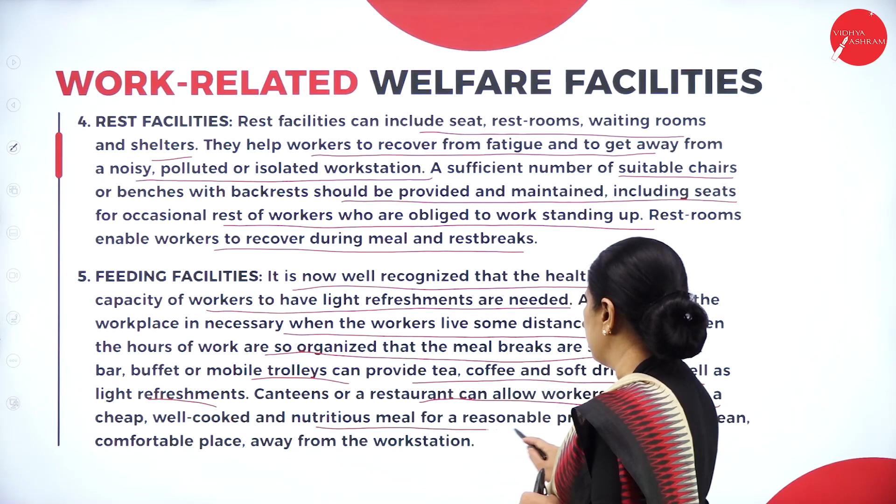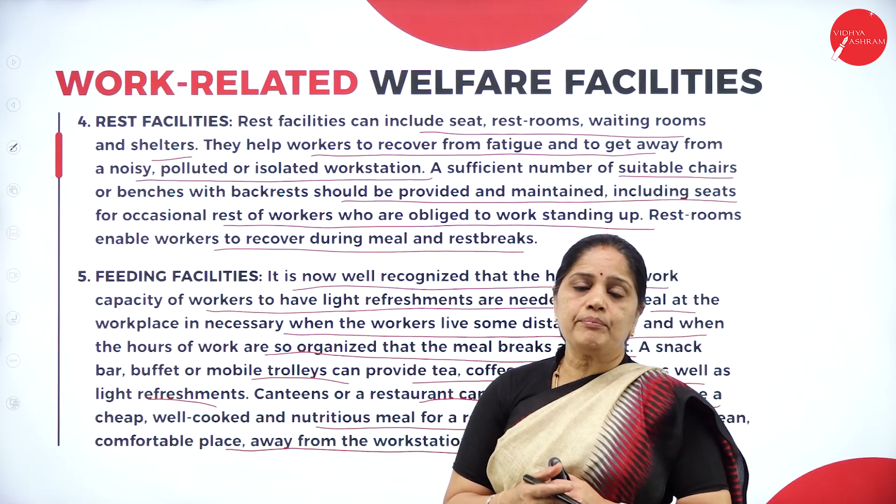Canteens or restaurants can allow workers to purchase cheap, well-cooked, nutritious meals at a reasonable price and eat in a clean, comfortable place away from the workstation. We should ensure there is a provision of a canteen that is clean and away from the workstation, so employees can purchase food and have it in a peaceful environment.

Then child care facilities. Many employers find that working mothers are especially loyal and effective workers, but they often face the special problem of caring for children. For this reason, child care facilities, including creches and daycare centers, should be provided. Mothers with small children should have proper daycare facilities, with someone to take care of the children while they are working.

These should be in secure, airy, clean and well-lit premises. Children should be looked after properly by qualified staff and offered food, drink, education and play at a very low cost to the employees.

Recreational facilities offer workers the opportunity to spend leisure time in activities that increase physical and mental well-being, helping employees rejuvenate and de-stress themselves. They may also help improve social relations within the enterprise. Such facilities include halls for indoor and outdoor sports, reading rooms and libraries, clubs for hobbies, picnics, and special education and vocational training courses.